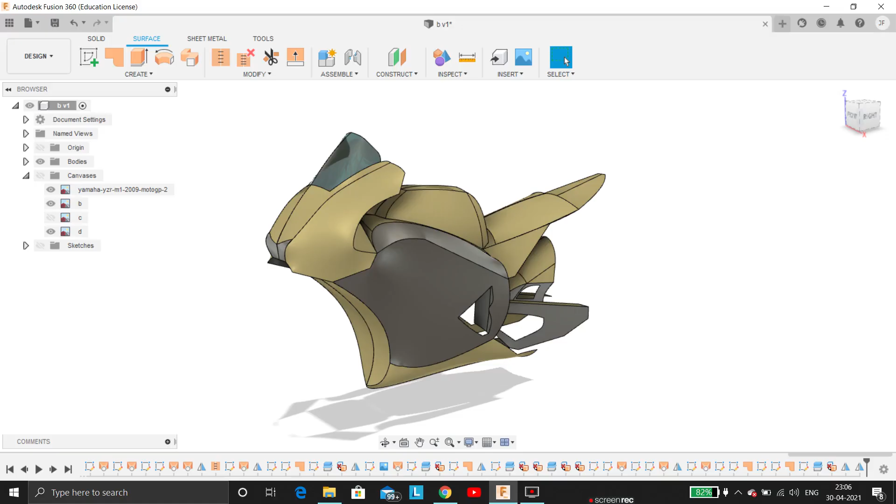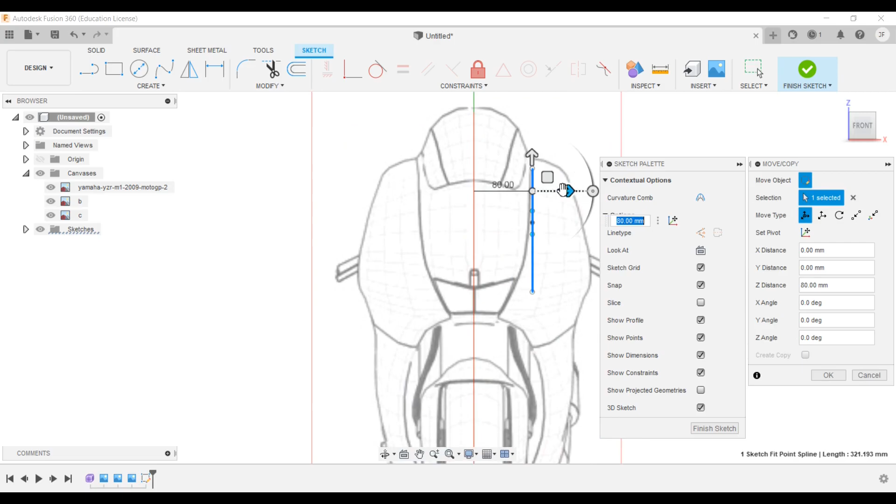Start by adding your reference canvases. In case you don't know how to insert a canvas, the link is provided in the I button. Next, select the right plane. Make sure your 3D sketch is turned on. Select spline in the sketch menu and gradually create the sketch to match it with the reference image. Rotate the views and bring the sketch in the required place. Using control points, modify the sketch and match it with the reference.

Make the remaining parts of the first body. Take your time while adjusting the control points. This will give you a better design.

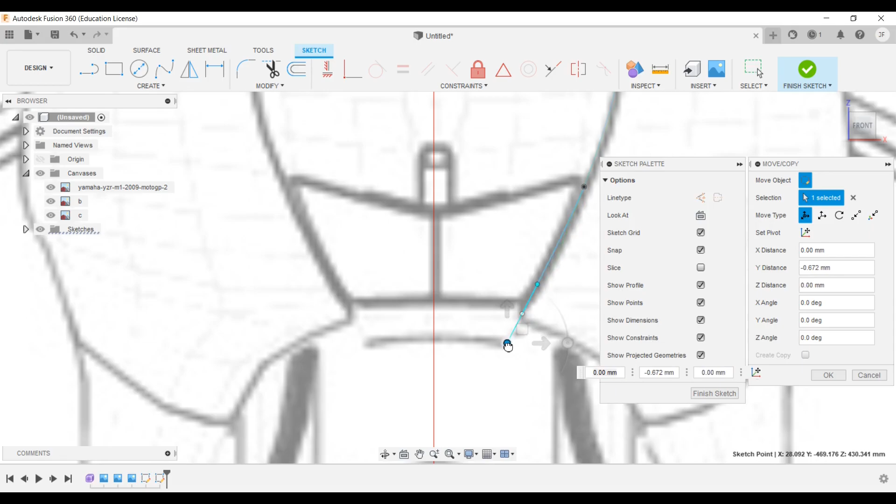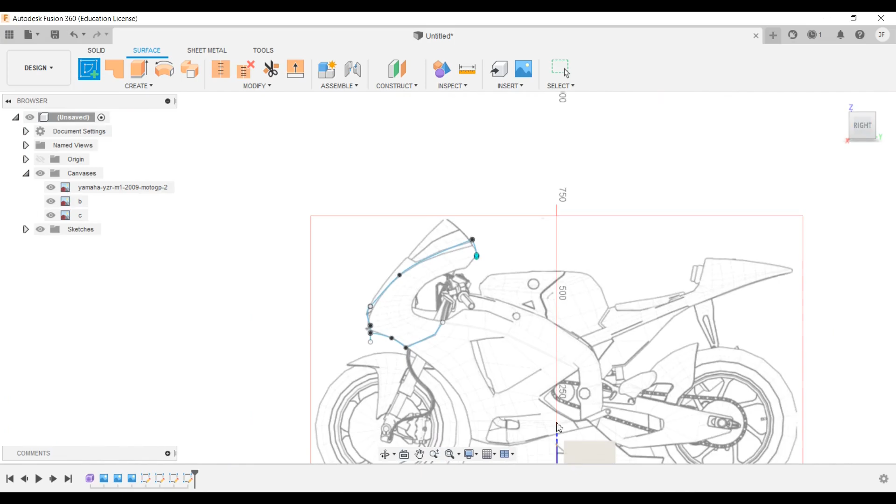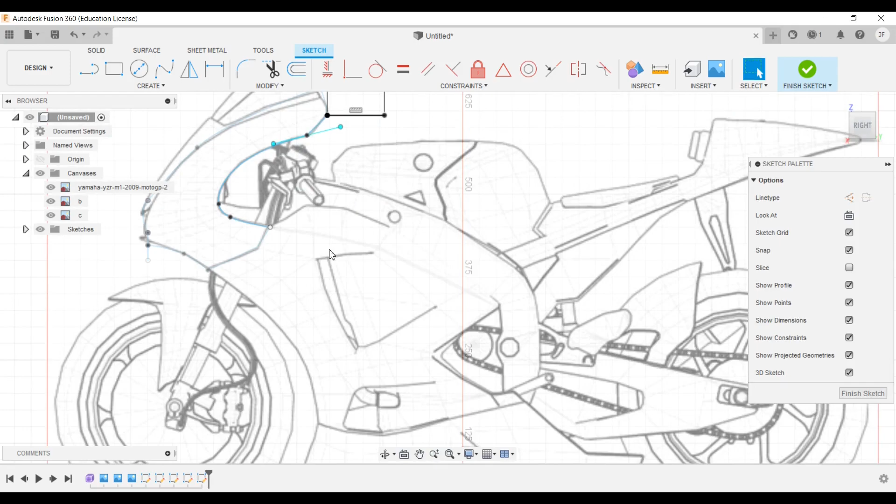You will continuously have to change the views to get the sketches in the proper positions. Finally, make a closed sketch and adjust it to match with the reference image.

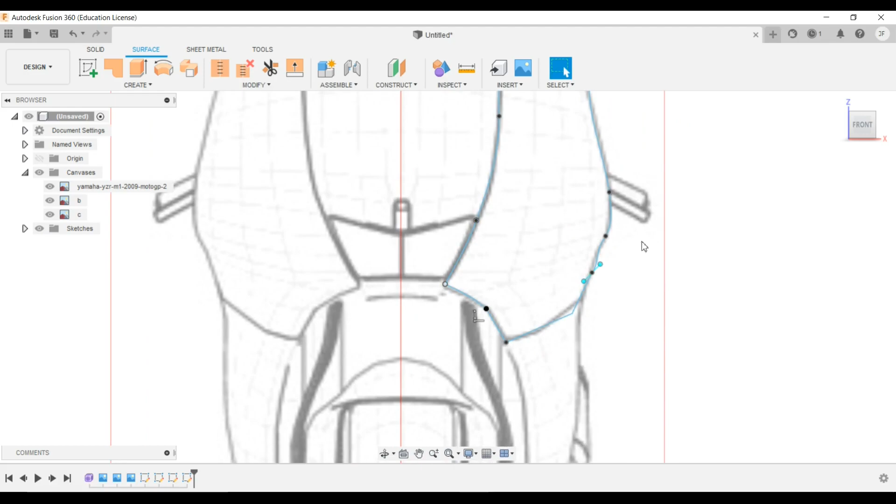Now, select the patch feature under the Create menu option and select all the splines. Perfect. We have now created our first body.

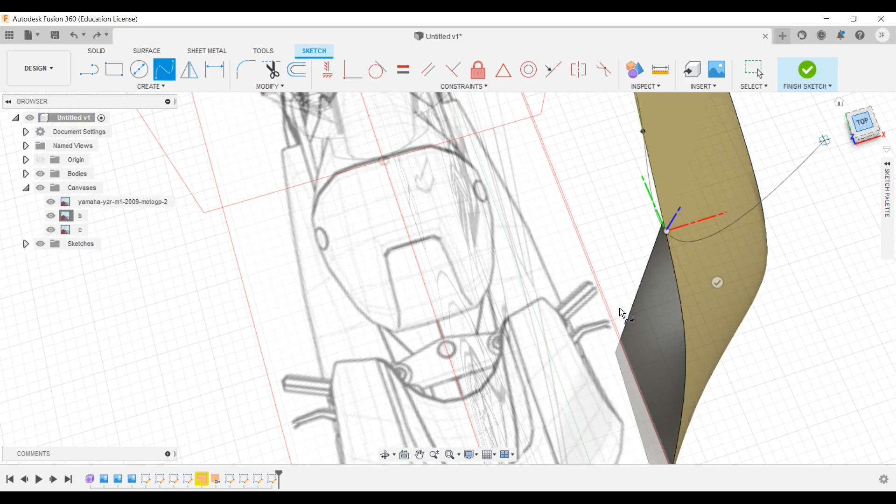Again, select Sketch and draw splines on the surface of the first body. Now, we are working on the second body.

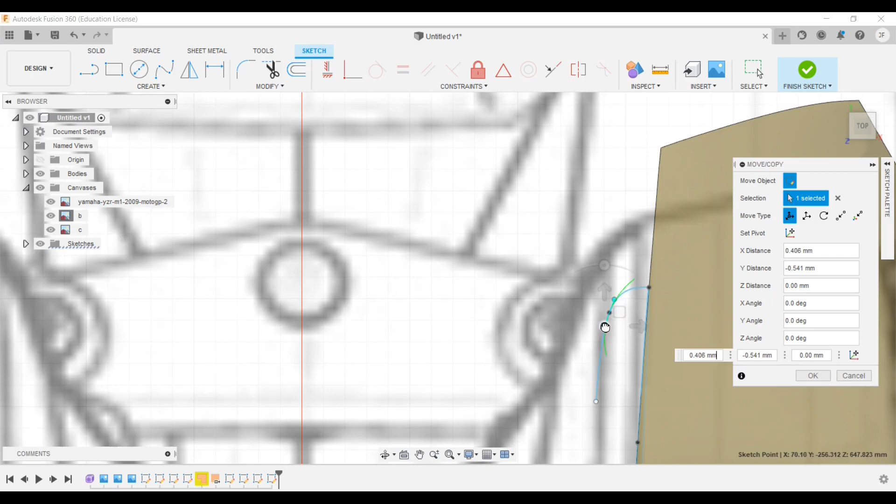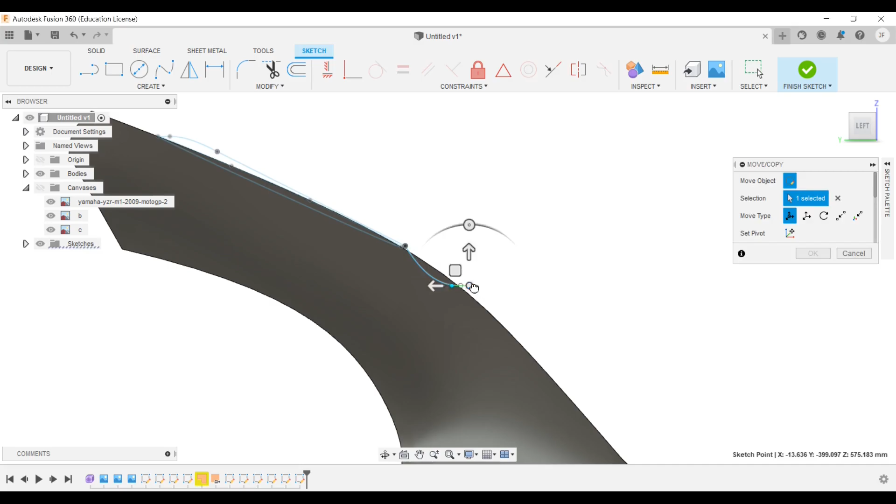Change the view and adjust the sketches after every step. In case you forget to change the view and adjust the sketches, you will face problems during modeling. Don't try to draw the model hurriedly, otherwise you will end up messing the entire model.

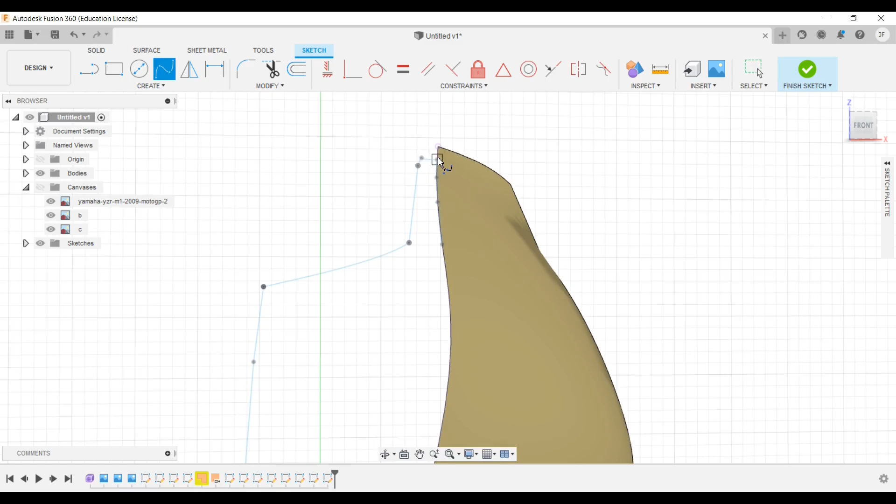Great. Now that the splines of the second body are done, let's go ahead and patch it. Select the patch option from the Create menu and select all the spline lines. Perfect. We have created a second body.

Now we work on the windscreen. Again, rotate your design and adjust the splines using the control points and match the splines with the reference image.

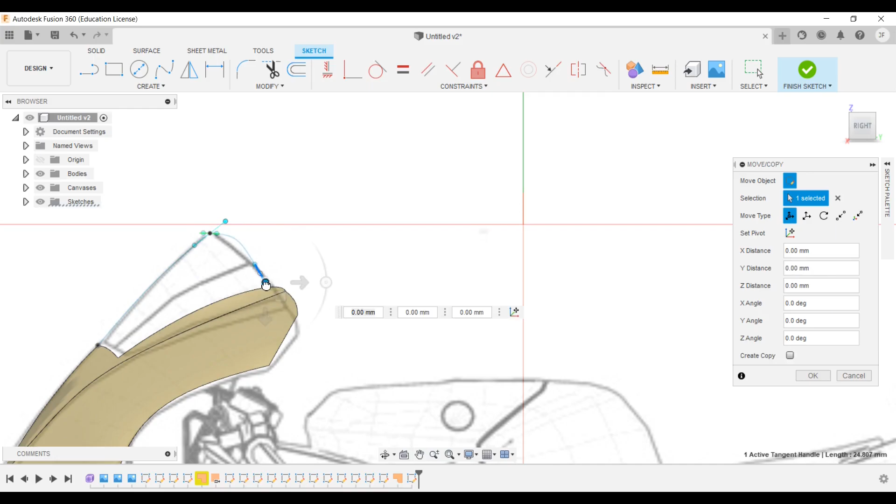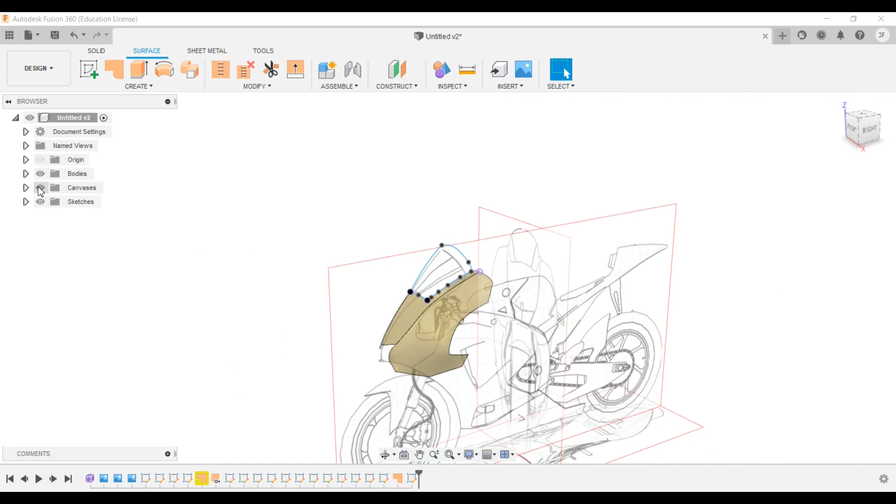Go ahead and patch this. Perfect. Next, click on Create and select Mirror. Select all the objects. Then, select the mirroring plane. Looks complete now.

Let's work on the side body. Select the sketch and draw the spline lines as shown in the reference. Go to the top view and adjust the splines.

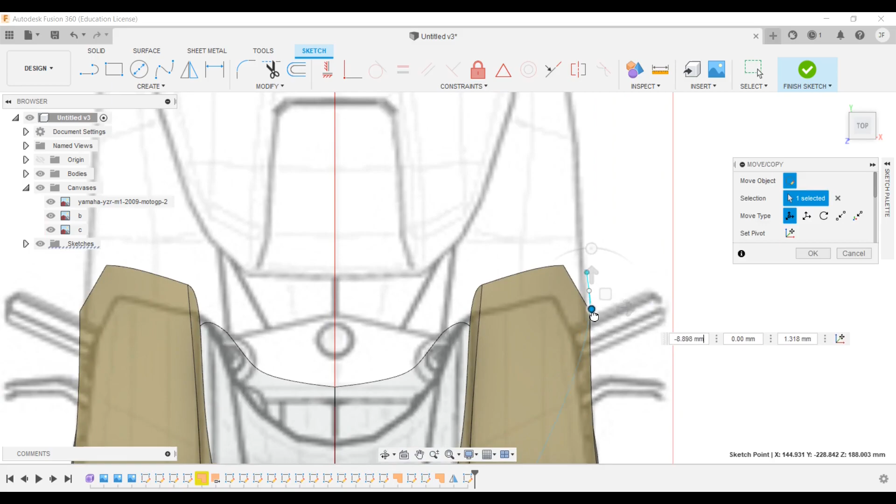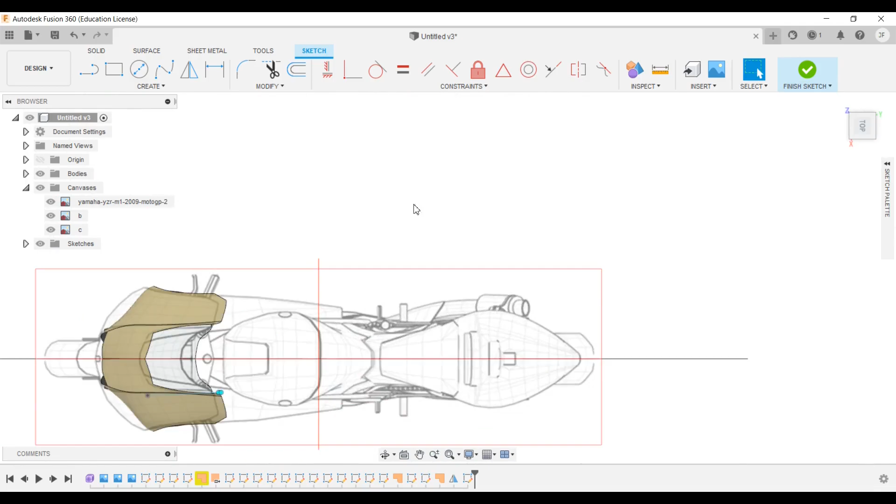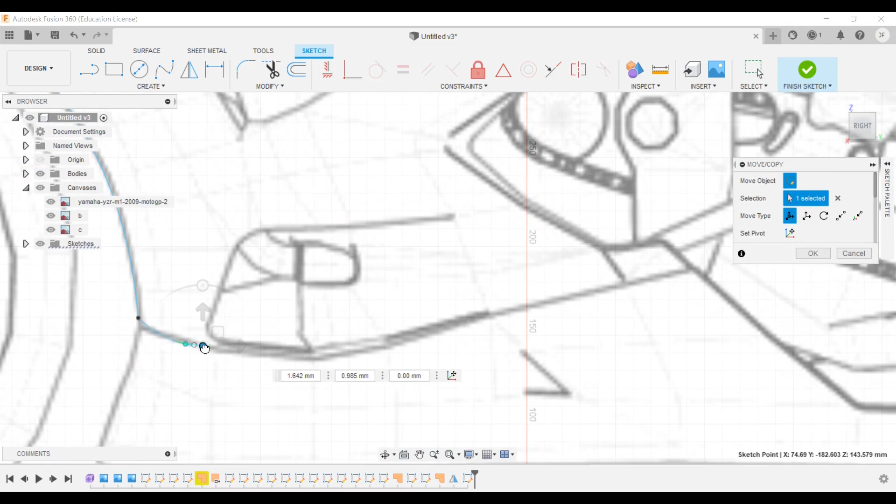Take your time and carefully edit these splines. The more precise the lines, the better the outcome. Once you get a hang of this, you will be able to do it faster. Quickly check for the splines in all the views.

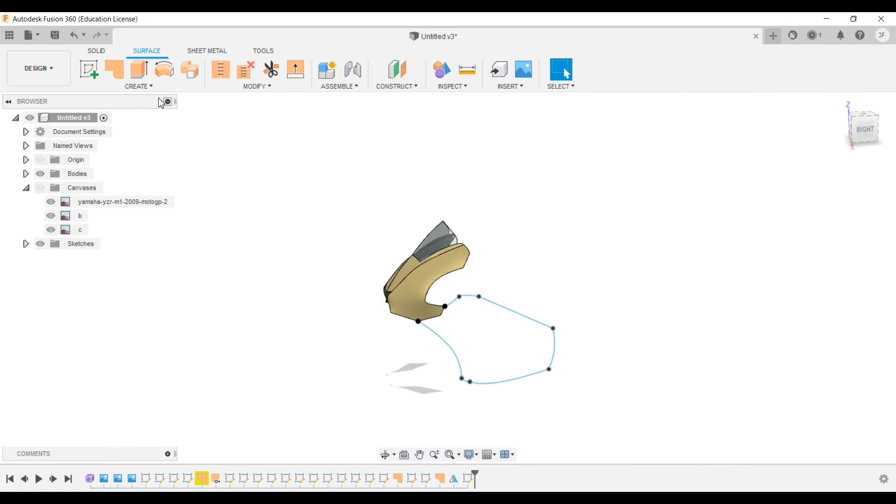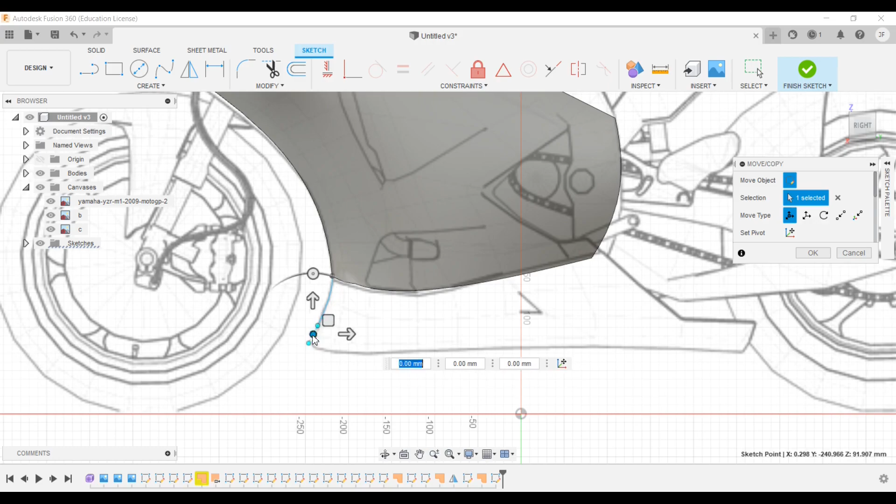Finally, create the patch. Perfect. Next, we work on the lower part of the frame. The bigger parts are usually the easier ones, as we don't have many control points, so it becomes easy to edit these splines.

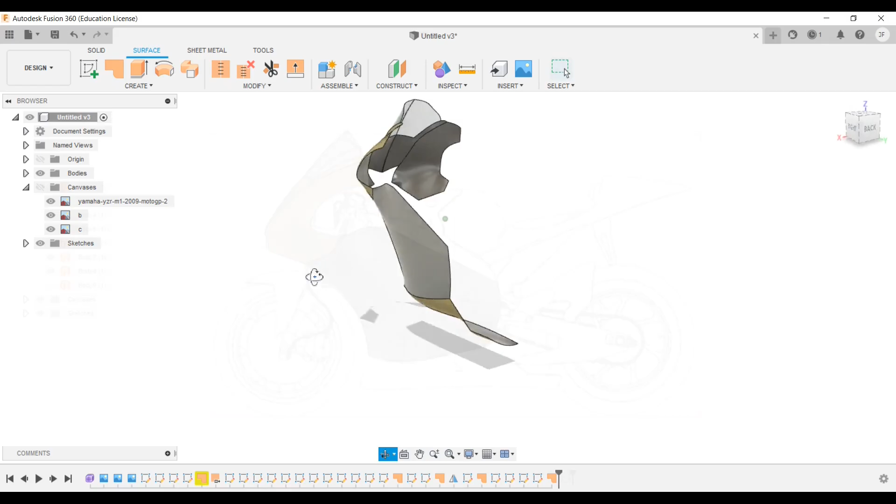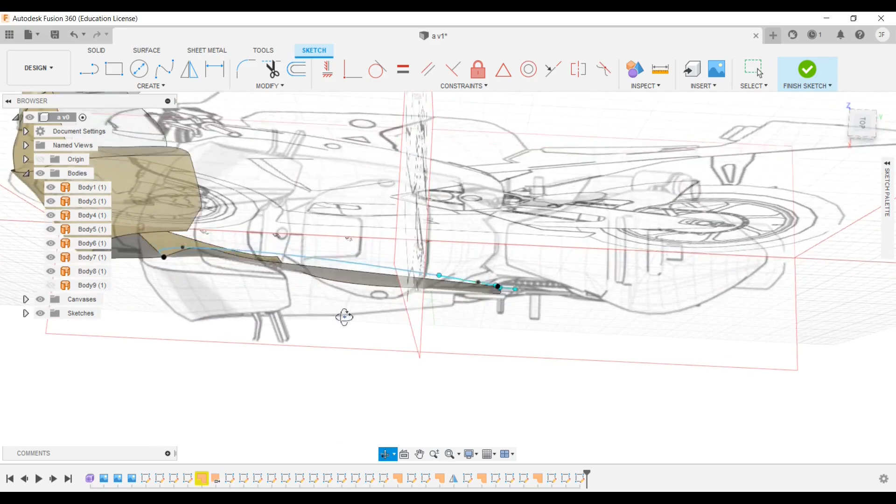Once you are done, go ahead and patch it. Let's create the top part of the frame in the same way. Don't forget to match it with the reference. Once done, go ahead and patch it.

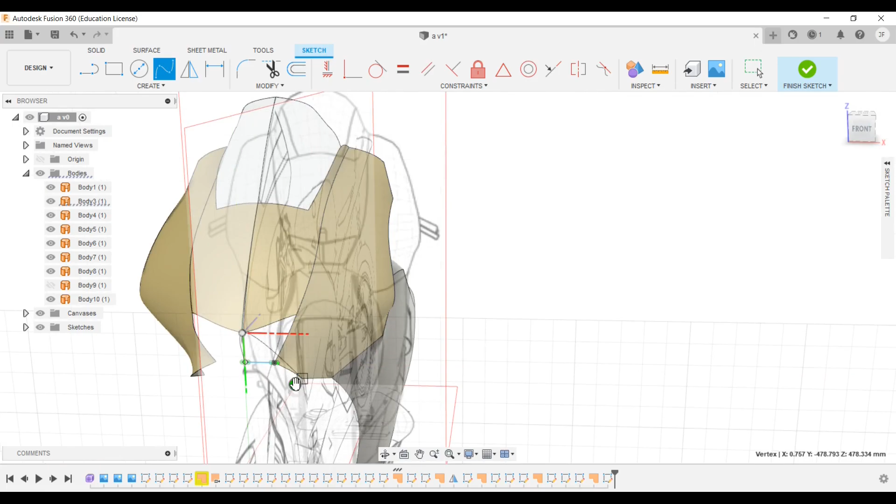Next, we work on the headlights. You can stitch the regions if you notice any gap. After completing the splines, patch it and then mirror them.

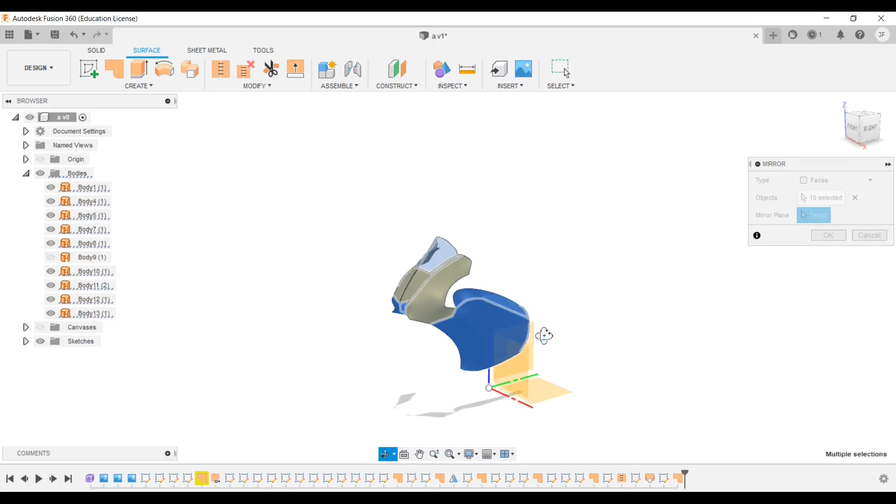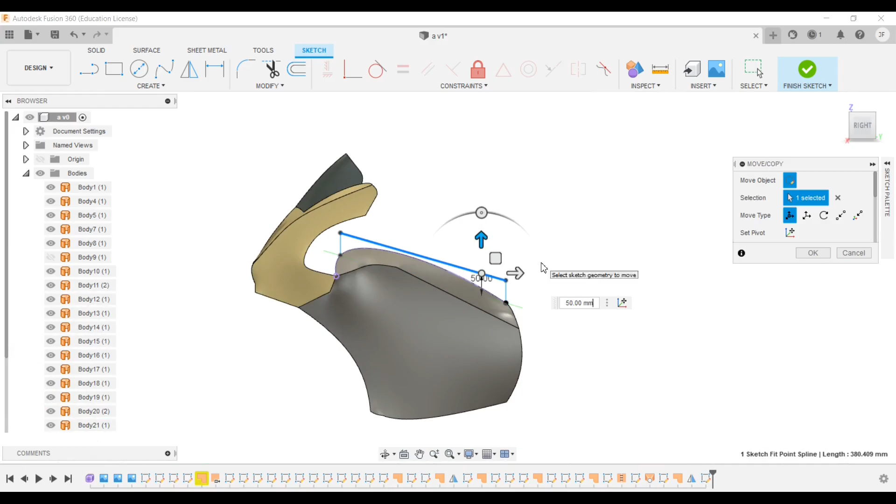Now, it's time to work on the top part of the bike. This time, instead of using the patch command, use the loft feature.

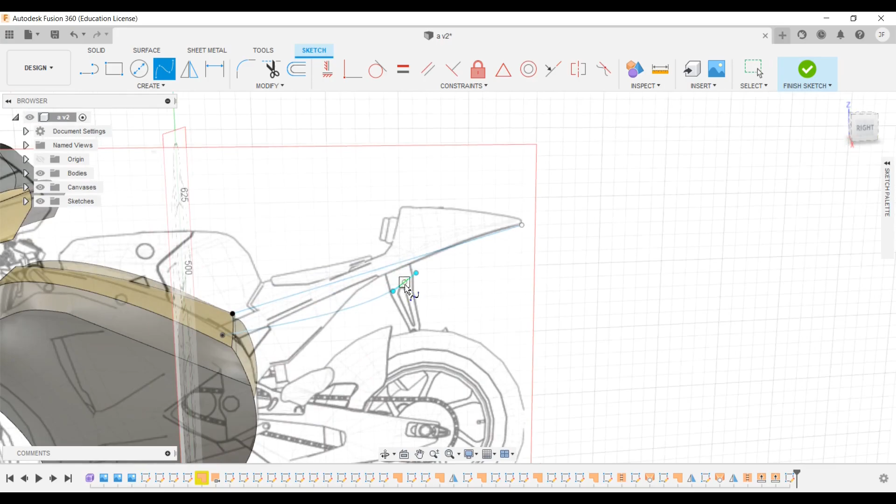Time to work on the seat and the rear region of the bike. Adjust the spline lines to match it with the shape of the seat. Make sure the splines have a smooth curve. Don't leave any sharp edges. Once done, go ahead and patch the splines.

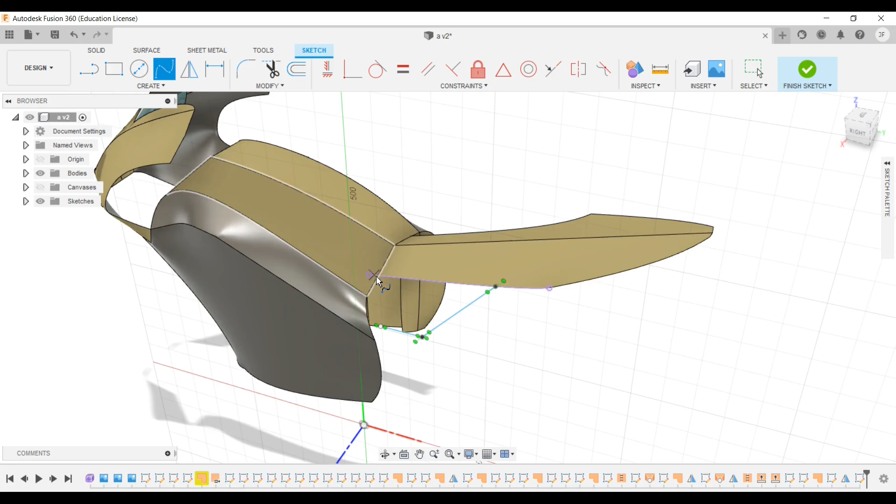When your splines look satisfactory, go ahead and mirror the bodies. Now, let's work on the tank of the bike.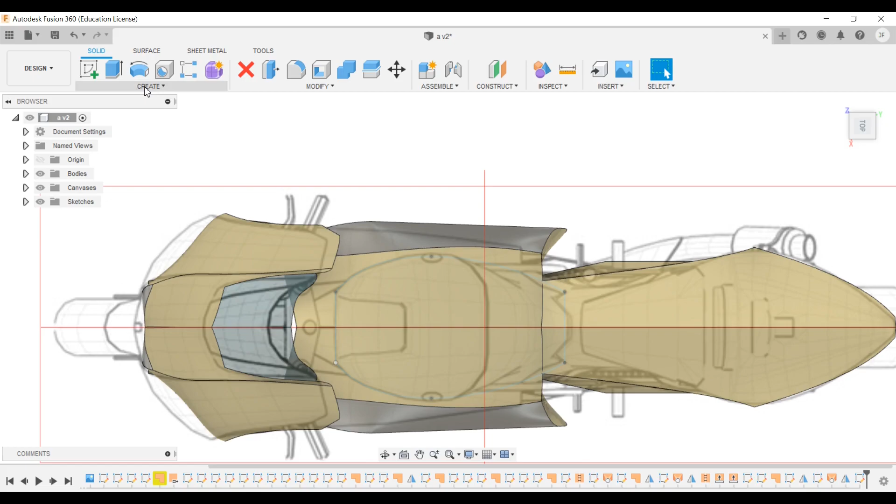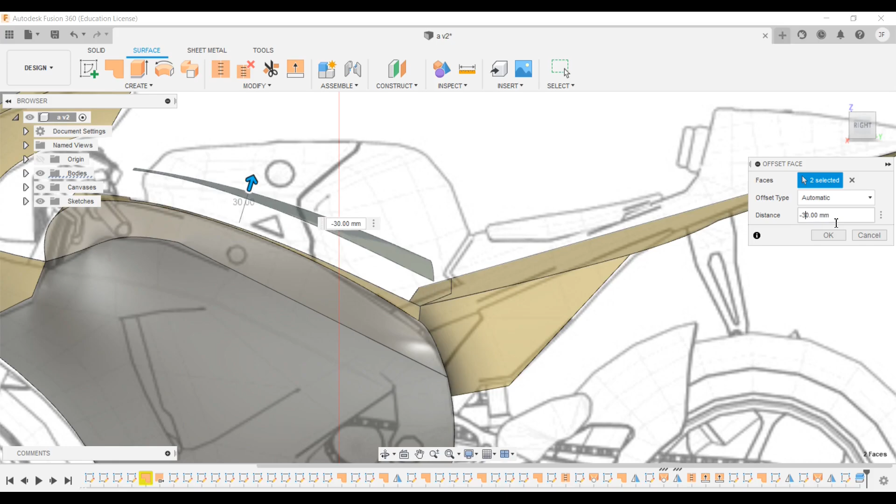Create the splines and use the split face feature. Create an offset of the splitted face and stitch them together. Use the scale feature and make the top portion smaller.

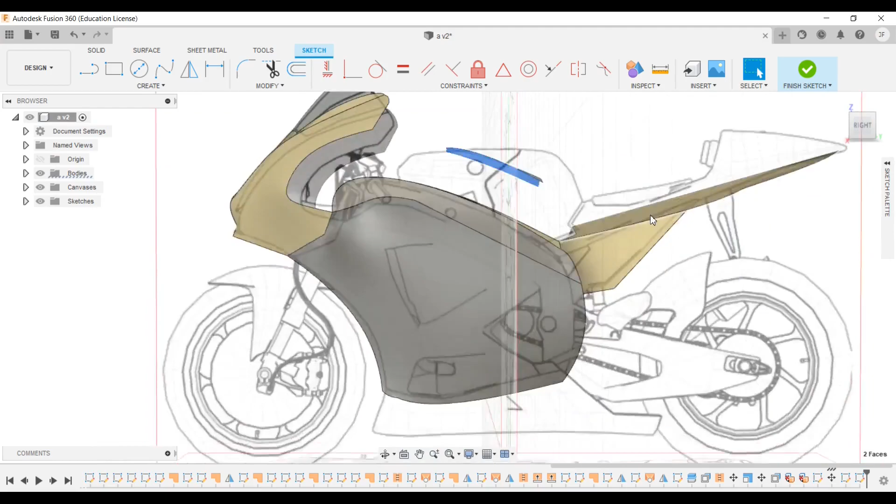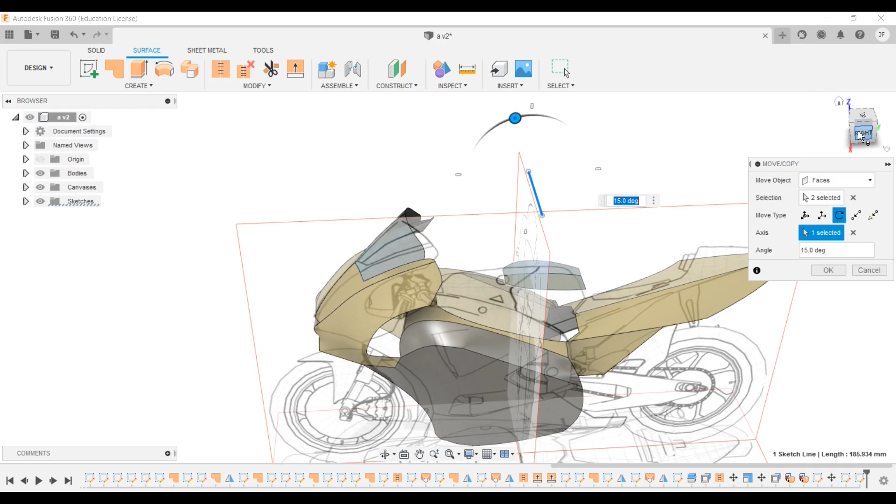If you see, we cannot rotate this body easily. So, we create a line and then choose the rotate about an axis option. Adjust the height and the position of the body.

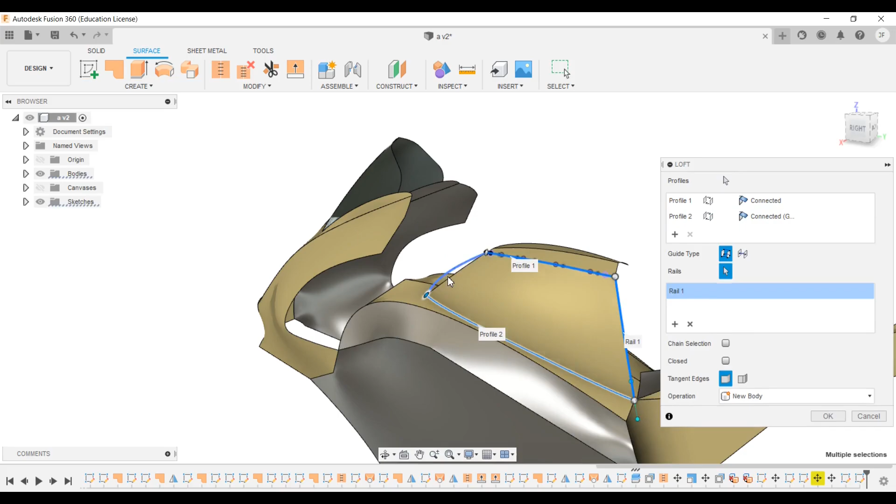Connect the top of the tank with the rest of the body and select the loft feature. Use the sides as the guide rails. Similarly, make the rest bodies and loft them.

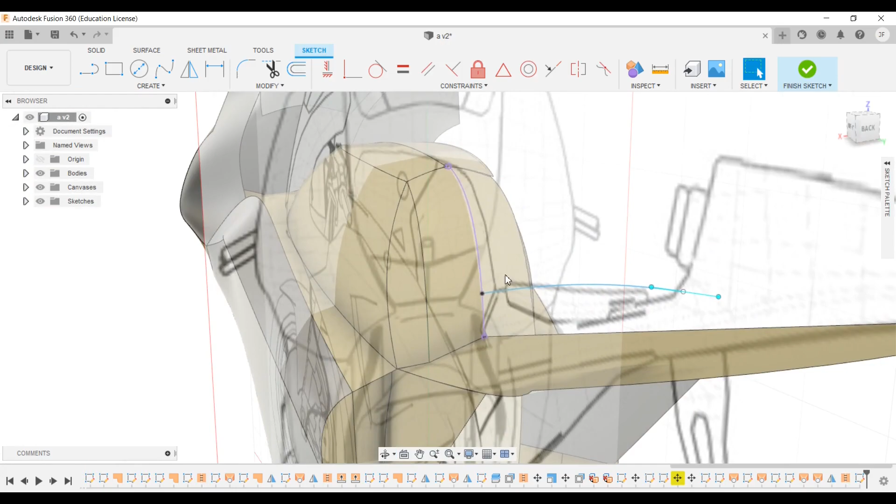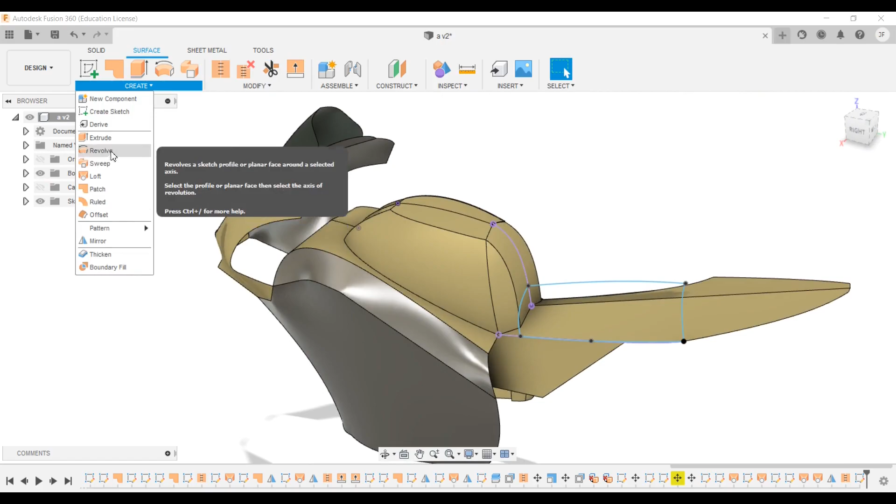While making the seat, make sure to give a curved surface to show the effect of a cushion. Once done, patch these lines and mirror the bodies.

Next, we work on the chain guard. Make the splines and patch it.

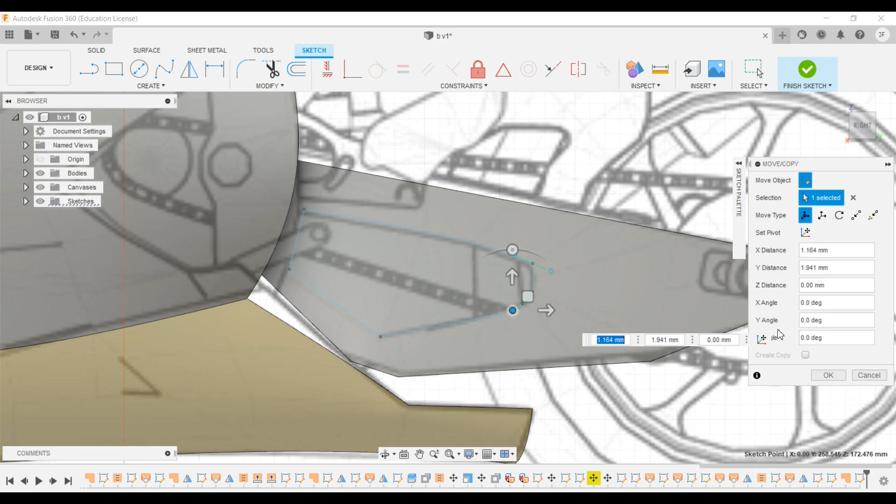Draw additional splines on the surface of the body and, using the split face feature, cut this face. Make a mirror of this body and join the splines and patch it.

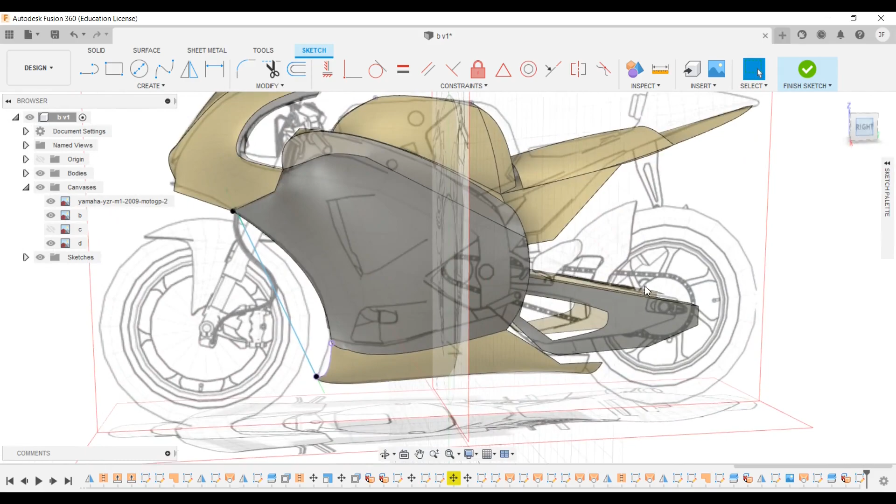Similarly, patch the front portion as well. Make the splines on the side of the body and cut the region as we did for the chain guard.

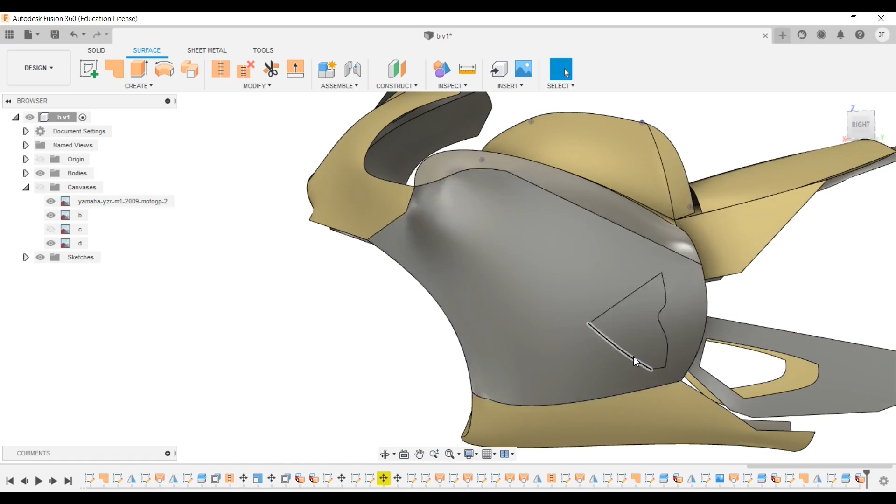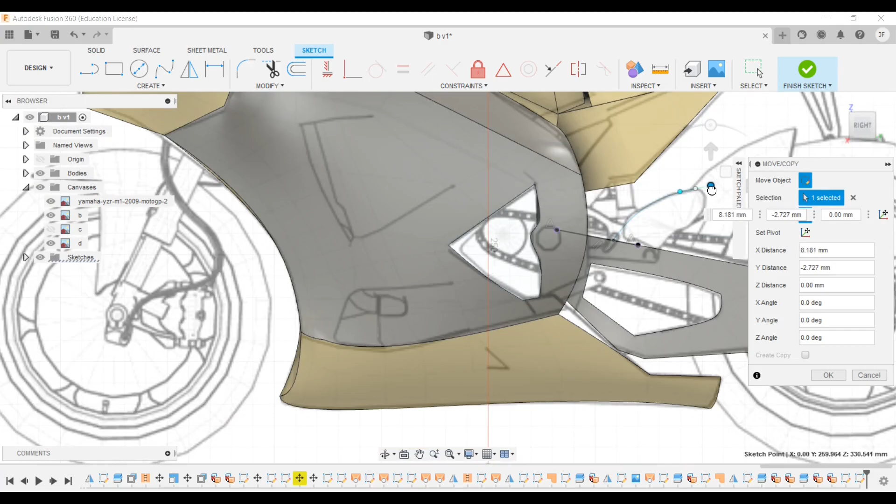Let's work on the mud guard. This part is slightly complex, so we break it into smaller parts and make the splines. Once the splines are ready, just use the loft feature.

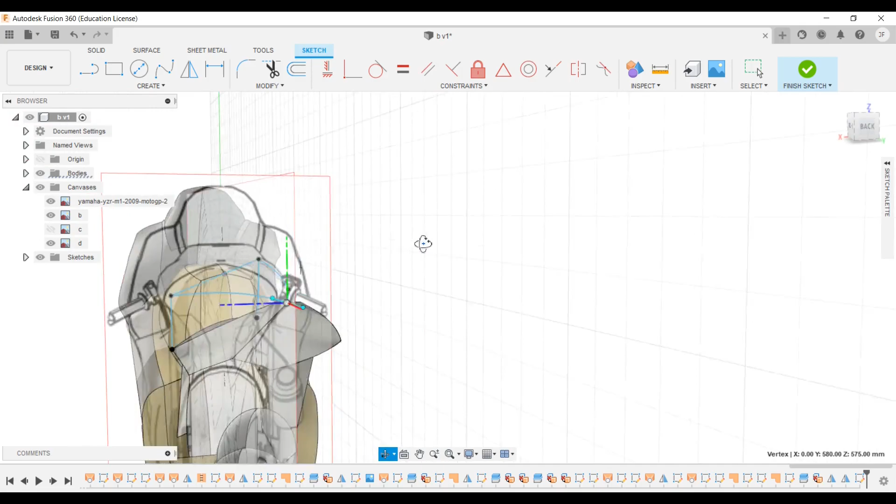Make the remaining rear portion of the bike and use the loft feature. Similarly, make the front mudguard.

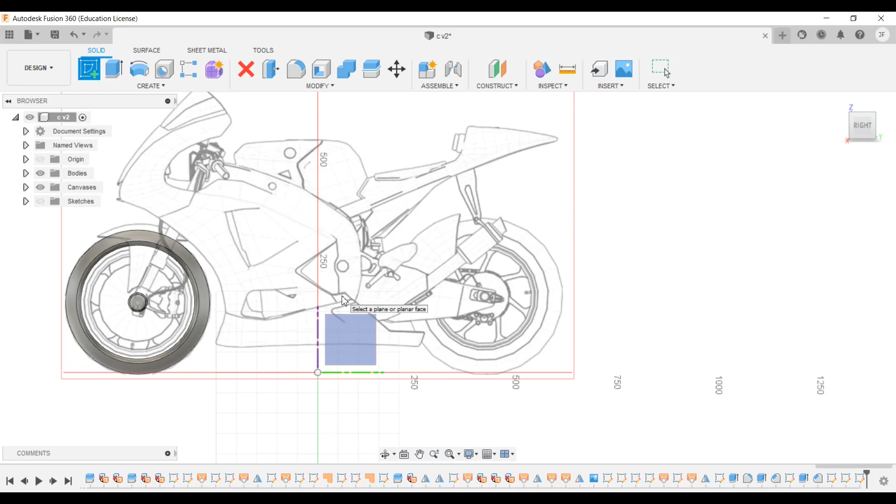Now, it's time to work on the wheels. Create a circle and simply extrude it. Use the fillet option and fillet its edges.

Extrude and cut the inner part of the wheel. Use the chamfer option and chamfer both the inner edges. Make the wheel axle in a similar way.

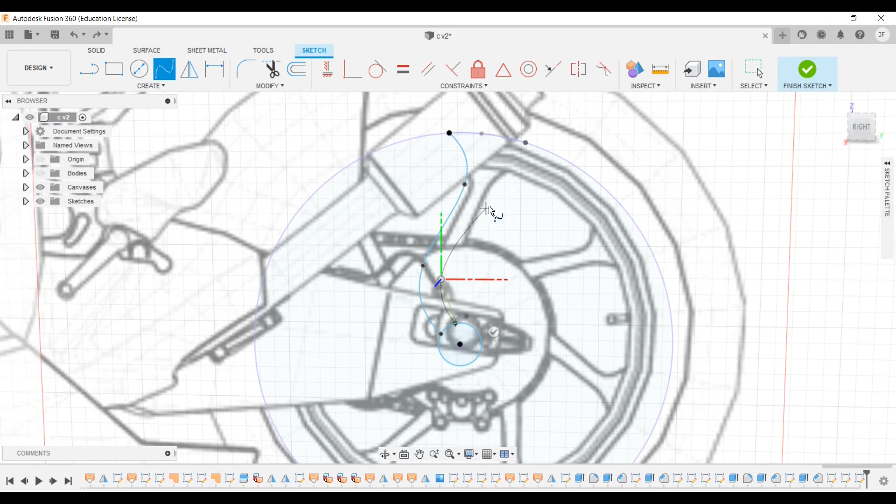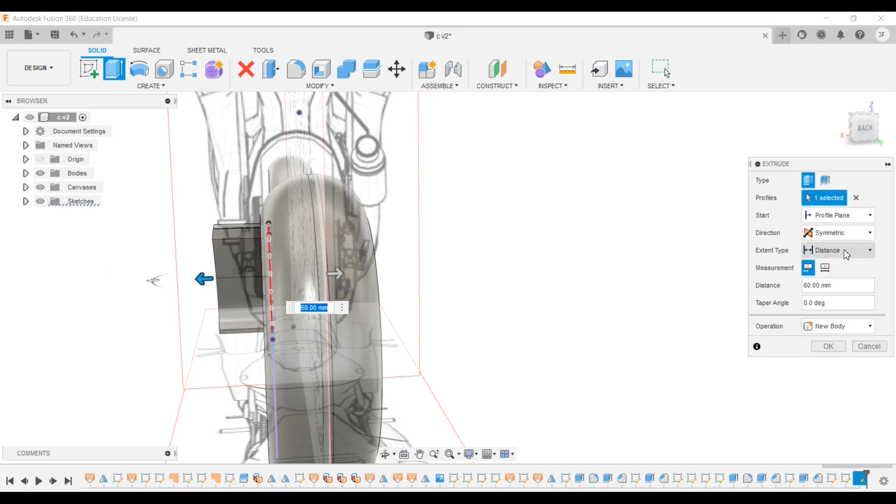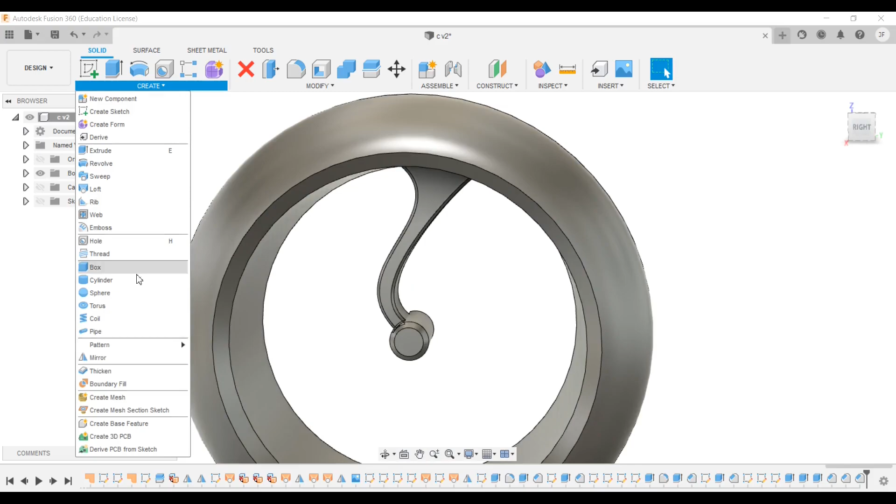Create the rim patterns of your choice and then extrude them. Select the pattern and use the circular pattern option to make the entire rim. Make a copy and place the wheel in the front.

The discs are made in a similar way using the circle and extrusion commands. Again, you can use any pattern of your choice for the disc.

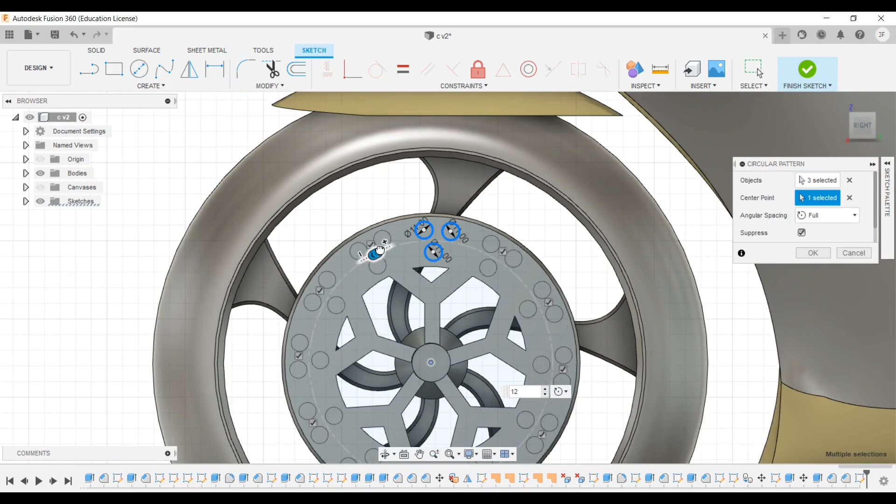Extend the rear wheel axle and hide the body of the bike so that we can design the chain and the gears.

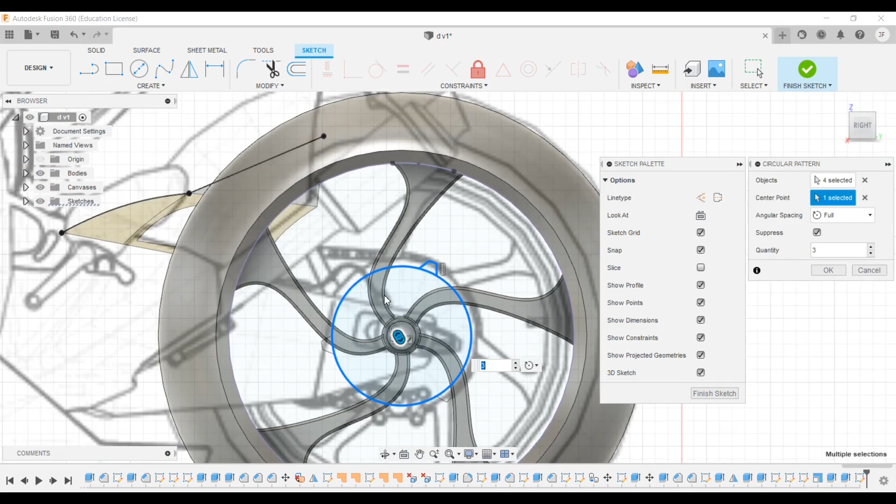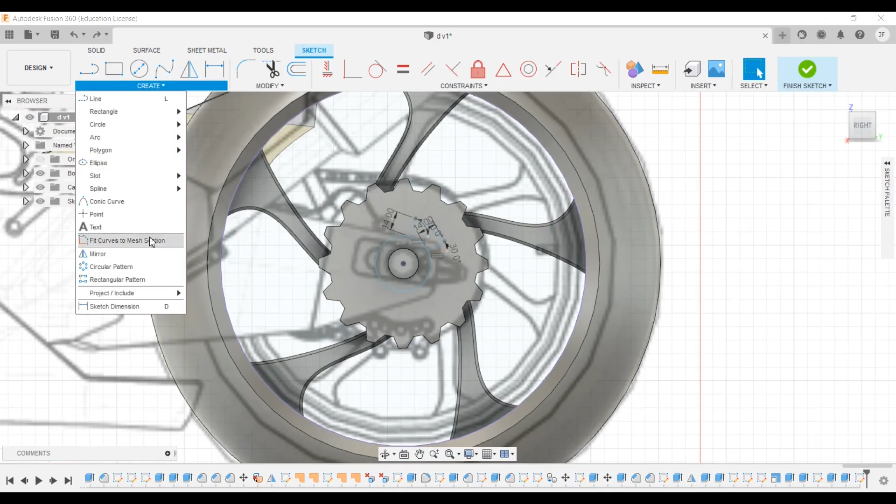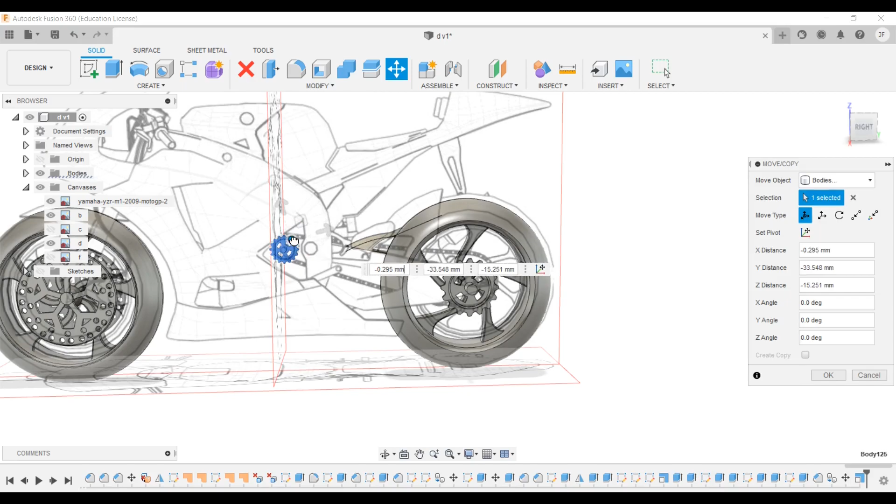The gear is just an extrusion of the circle and the teeth pattern. Make a copy and scale the gear and place it inside the body of the bike.

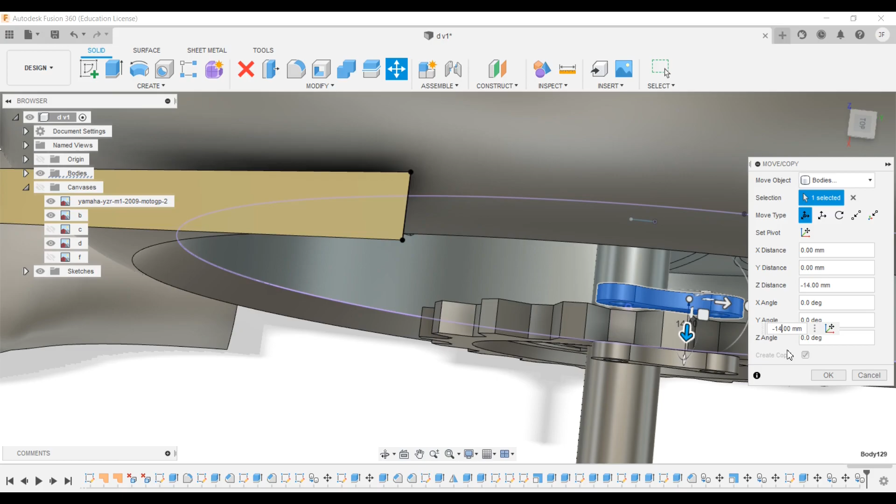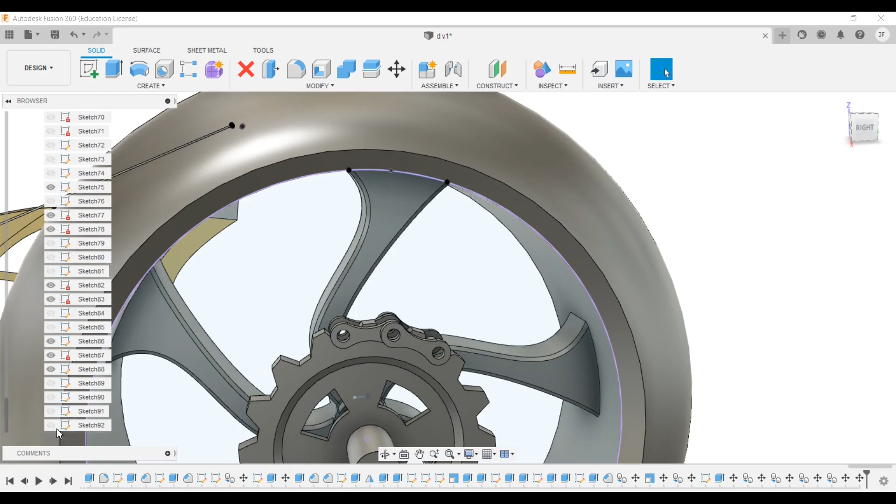For the chain, I have used two circles and a 3-point arc connecting both the circles. Once done, extrude it and make copies of this. Next, use circular and rectangular patterns to complete the entire chain.

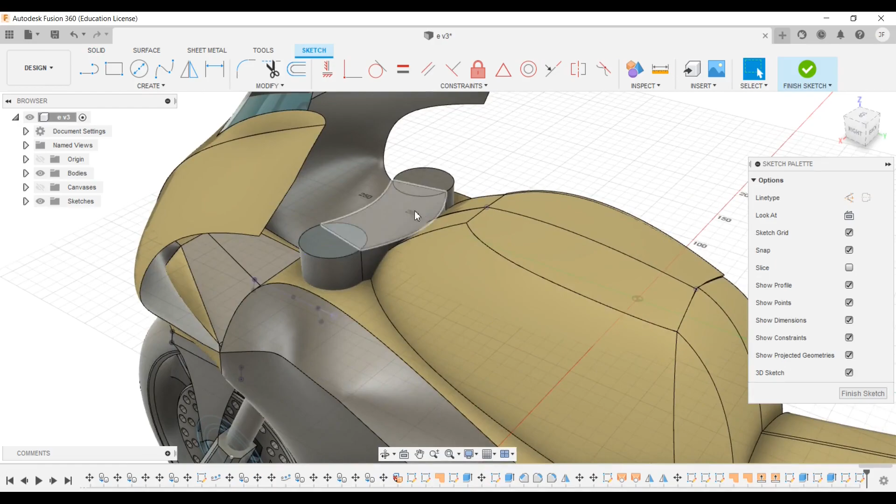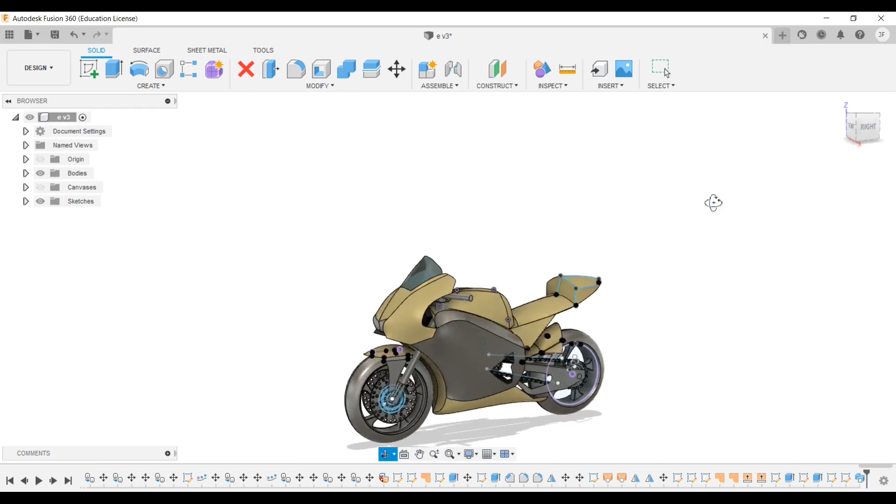For the handles of the bike, use the sweep feature. Select the profile, then select the path. You can modify these handles according to your choice.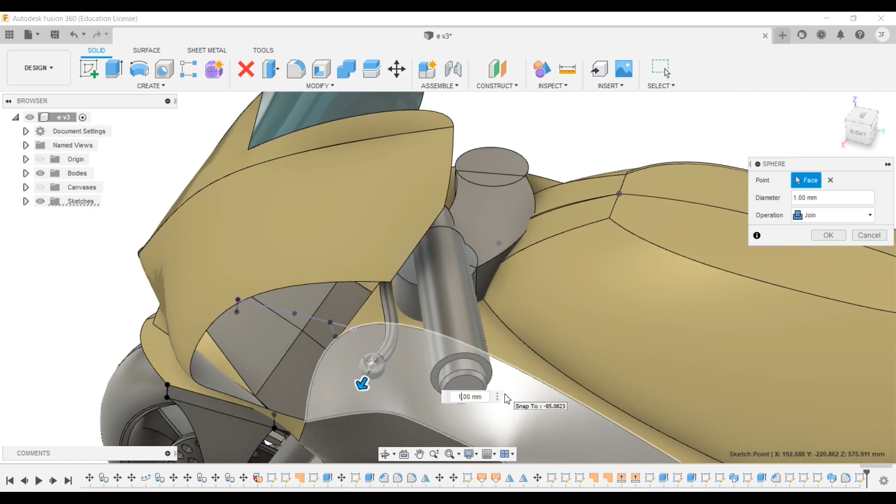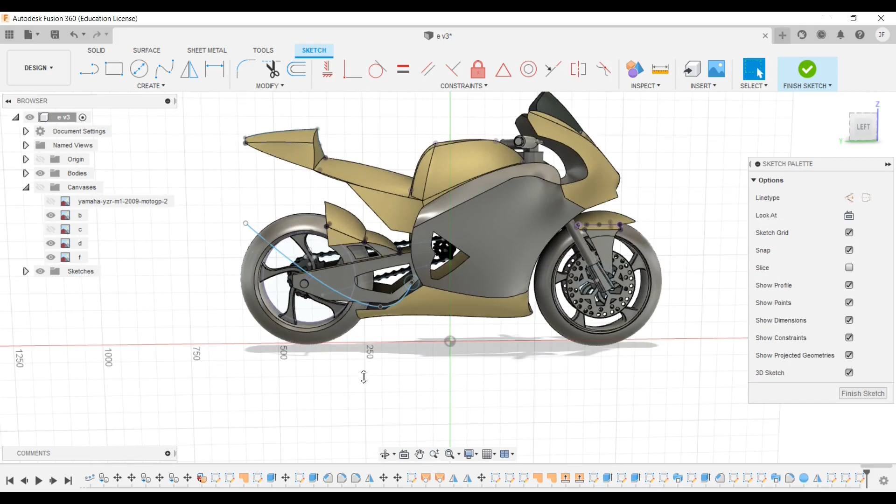The brake handles are made using the sweep feature as well. To make the exhaust, again use the sweep feature. Select the profile, then select the path.

There you go, we have created the body of the bike. You can add different and multiple features like the suspension and the engine. Let's go ahead and color this bike. You can choose any colors in the appearance and apply different materials to the bike. This is completely your creativity.